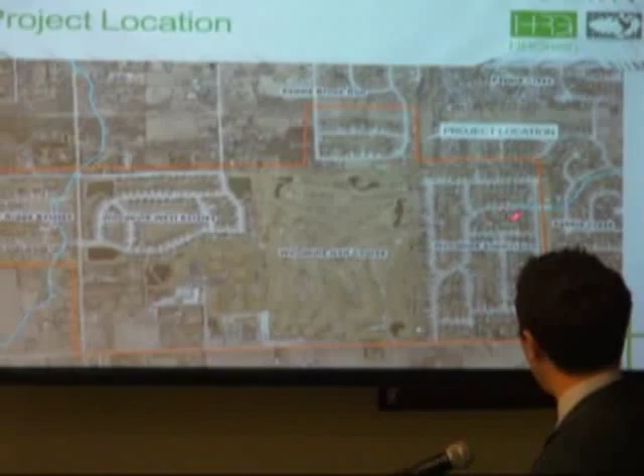So within the entire village, this is where we were studying, and more focused in, we're studying these subdivisions. It's important to note that these two streams here are part of the Long Run Creek watershed. So part of our project, we did a lot of background research to determine the extent of flooding, and just how frequently it was happening, how bad it was. We did this by meeting with village staff and the road district. We also looked at photos that were supplied by the village and road district as well as residents. We reviewed available topographic data to determine the areas draining into the study area.

And then we also sent out a resident questionnaire. I believe we sent out approximately over 450 questionnaires, and we received about 33% back. And for studies of this nature, that is basically unheard of. 10% is a good percent. We got a lot of return on this, so it's definitely worth doing the resident survey. And then we also held a public meeting where residents were able to come in and ask questions about their specific properties or bring up ideas of how we could solve some of these drainage issues.

All this information was used to generate a hydrologic and hydraulic model, which we used a computer program called XP-SWMM to model the watersheds and determine how flooding was actually occurring. So this is just a photo of a past event. This is an intersection in the Woodbine subdivision. It actually looks like a lake. So this is, to me, very serious flooding for a neighborhood to have.

And when we started doing some of the topographic research, we did notice that this type of flooding made perfect sense. We have a lot of off-site areas that are actually outside of the study area, but they drain into these neighborhoods, so they need to be accounted for.

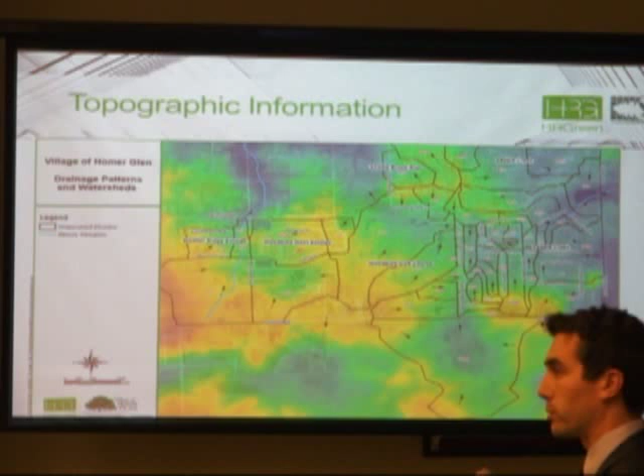We've presented this image before, but this is just showing the study area with elevation depicted as color. The orange and yellow are the high areas, and then as you go down, you get the green and blue areas, and that just shows you the relief throughout the study area.

So our resident survey came back, and we went through and mapped who responded to the survey, and then depicted what type of flooding they reported based on color. We surprisingly actually had a lot of people who reported that there was no flooding. The people with this black hatch over them, they reported that they did not have any drainage issues on their property. And then as far as people who did report issues, we kind of did what we thought was an intuitive way of depicting their problem.

Red was the worst type of flooding to be reported. This was structural flooding of a basement or a home. Yard and street is everything being inundated. And then all the way to yard flooding, which was depicted in green, which it's a problem, but a home wasn't flooded in these instances.

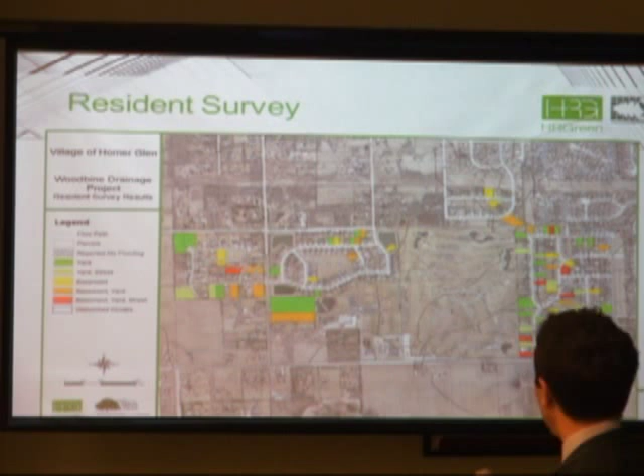So, as a reminder, we've presented this before, but there are really three ways to manage stormwater. The first is to convey it. This is to put larger pipes in the ground, to open up ditches and swales. You can also detain it. This is where you store water in a detention pond and release it slowly so that your conveyance system can manage the flow that you're releasing.

And lastly, you can infiltrate it. Now this is the use of rain gardens or naturalized detention basins in which you actually will soak water into the ground rather than conveying it directly to a stream. This can be useful for smaller events where rain isn't that intense. You can actually hold the water and rely on it to infiltrate into the ground.

However, we did a soil study for the area, and there's a lot of clay in the ground, and clay does not readily infiltrate water. So for large events, infiltration will not be the solution to any of the issues out here.

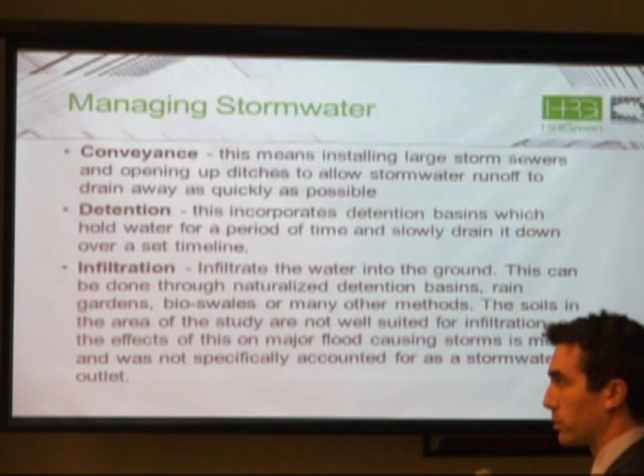So now we're going to go through subdivision by subdivision and discuss some of the improvements that we've been proposing. We're going to start out with Stadtler Ridge Estates. As I had mentioned before, from the southwest, we have a fairly large drainage area of agricultural land. It's draining basically through the subdivision to the northeast. It's, I believe, 58 acres draining through a subdivision that most likely was not designed to have that flow go directly through it.

The primary source of conveying stormwater through here is a 12-inch field tile. And that's depicted, this red line here. It zigzags through the subdivision and outlets into a detention pond on the northeast corner.

Now, field tiles are pipes that were most likely installed before any of these subdivisions were here. They're put in the ground and they're meant to drain groundwater. Over time, people will tie inlets into them and use them as a storm sewer, but in reality, these were most likely installed to drain agricultural land. Now, agricultural land, if it rains and there's water stored on the surface for a day or two, it's not really bothering anybody.

But when you build homes there and rely on that to drain everything out, if you have water standing in people's yards for a few days, or potentially flooding a structure, that's not the best way to drain your areas. It's not very reliable. So something that we've been proposing is to take that drainage area from the southwest and actually bypass it around the subdivision.

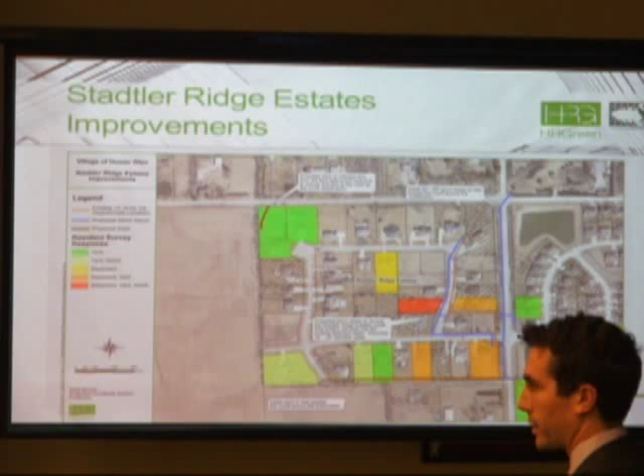Now, you may be thinking, why can't we just increase the size of that drain tile? We are able to actually improve the drain tile within the village's right of way. However, if it's on private property, it is up to the private property owner to maintain that pipe. So to really make this something that the village can rely on to drain the subdivision, we're proposing installing something entirely within the right of way so that we have rights to it, to maintain it, and just to make sure it's functioning properly. We believe that this will address most of the drainage complaints that we received throughout the Stadtler Ridge Estates subdivision. Next, we're going to move on to the Woodbine West subdivision.

Through the topographic survey, this area is actually fairly well drained. It has some good relief to it, and it's higher up relative to the surrounding areas. I did mention, though, that the southern portion of it down here has 45 acres draining into this detention basin here, which then flows through private property. We spoke to this property owner here, and they were mentioning that they do have yard flooding frequently. Something that could be done is an open channel could be graded on their property. However, this is on private land.

And additionally, downstream of there, we have a section of drain tile that is within the village's right of way, the road district's right of way, that can be improved upon, but everything on their property would be their responsibility to improve. So we are able to actually make modifications to this basin or modify the drain tile downstream. And this should improve things for that property owner.

Now, you might notice a lot of other people up here who've filed basement flooding complaints or yard complaints. This area is actually one of the highest areas throughout the entire study boundary. And it doesn't really make sense looking at the topography that they would have drainage complaints there. The plats for this subdivision have a swale running through the rear yards with the high point being right about here. But if you look at the aerial photography right now, homes just downstream of where we were receiving complaints, it appears that they've actually built fences across their swales that were meant to drain out the rear yards and potentially installed landscaping that would block flow paths. And we end up getting drainage complaints directly upstream of them.

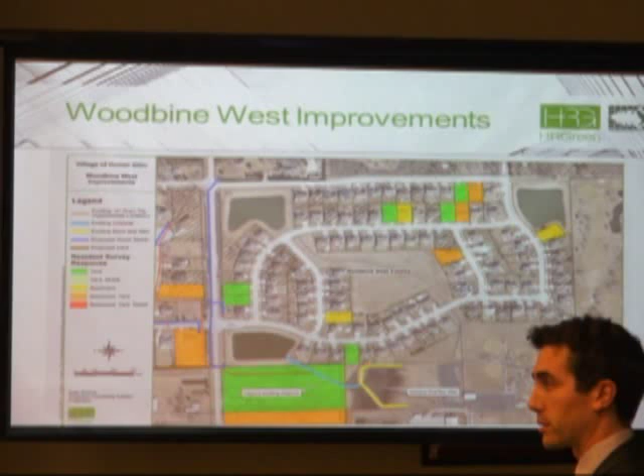The next subdivision was the Saddlebrook. This is another very high area, and all the reported flooding through here had to do with sump pump failures. So again, we do not propose any improvements here. Through studying the drainage system here, it appears to be functioning fairly well.

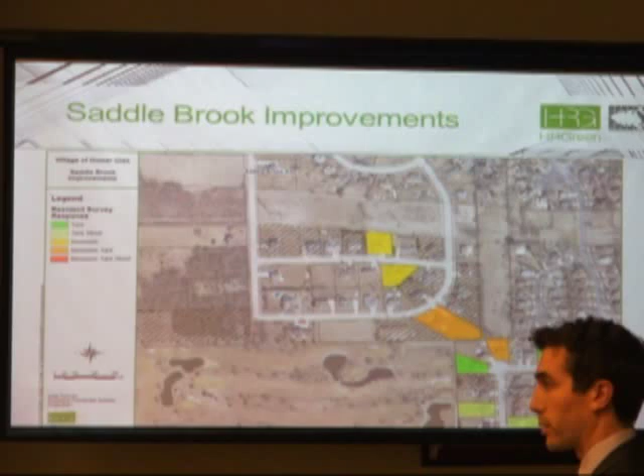And this leaves the Woodbine subdivision. This has the largest area draining into it and did have a very high rate of response from the residents during their survey. So because this was such a complex drainage area with large watersheds draining into it, we used a two-dimensional XP SWMM model here.

Now this is a computer program that takes all of the storm sewer system and links it to a 3D surface in the computer. So anytime the storm sewer or ditches become overwhelmed, it'll actually let the water overflow onto a 3D surface so that we can map how far flooding actually occurs, how deep it gets, and how long it stays on the surface.

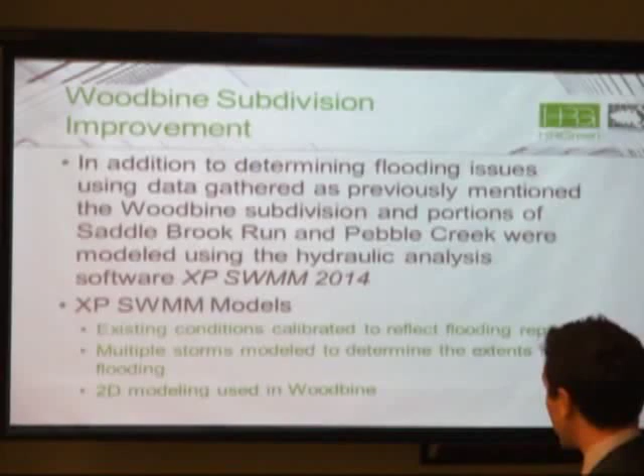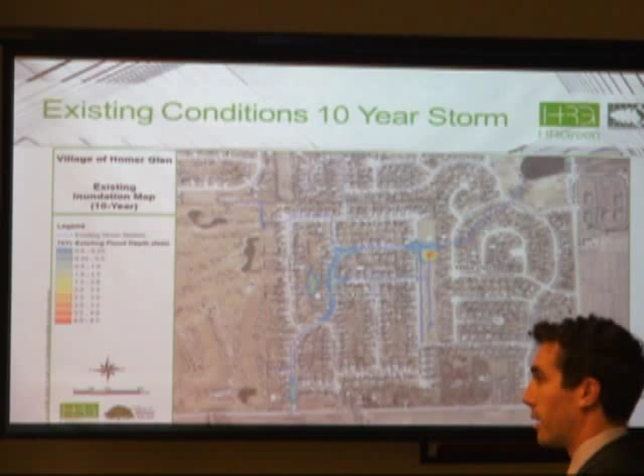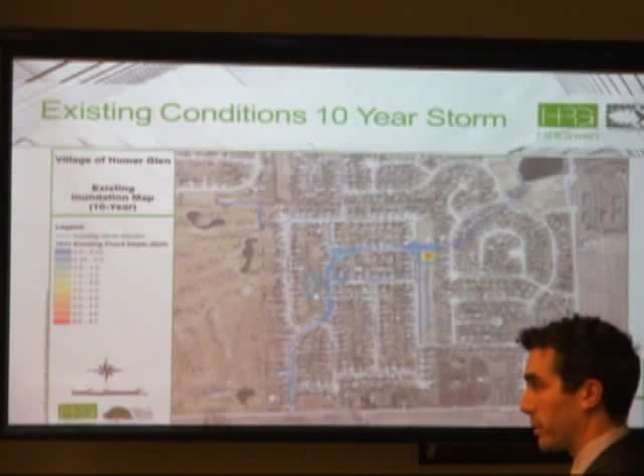So, our solutions, as I mentioned, infiltration with heavy storms in the soils that we have is not really viable. So we looked at conveyance and detention. Through a survey of the storm sewer system, we did determine there are a few locations where the storm sewer was actually constructed so that it's back-pitched, meaning it does not slope downhill. Water will actually have to build up in the pipe before it can drain down. So we noticed that in one location that is actually a pretty big issue.

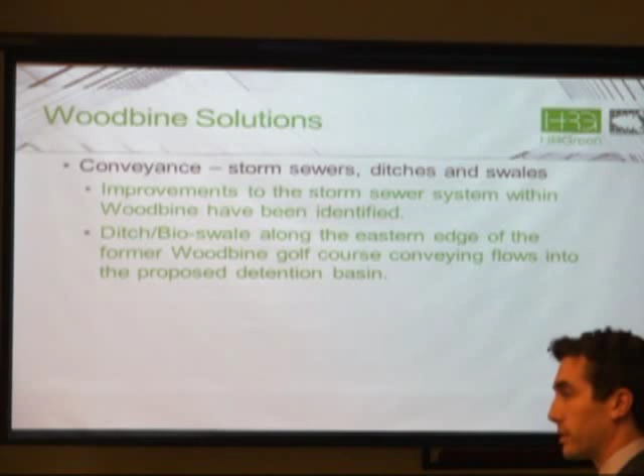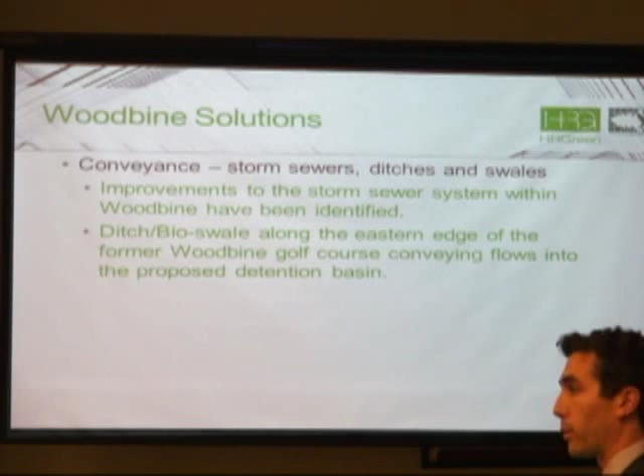We did notice that some of the sewers appear to be undersized, and that we did also get a lot of complaints from residents who lived immediately along the former golf course, saying that the golf course just sheets into their backyard. They have kind of undefined flow entering their backyards. So something that we're proposing there is potentially a bioswale to direct flow out of their yards. A bioswale is just a ditch that's planted with native plants. They're actually very visually appealing, and they help a lot with water quality. I'll talk about that a little bit more in a moment.

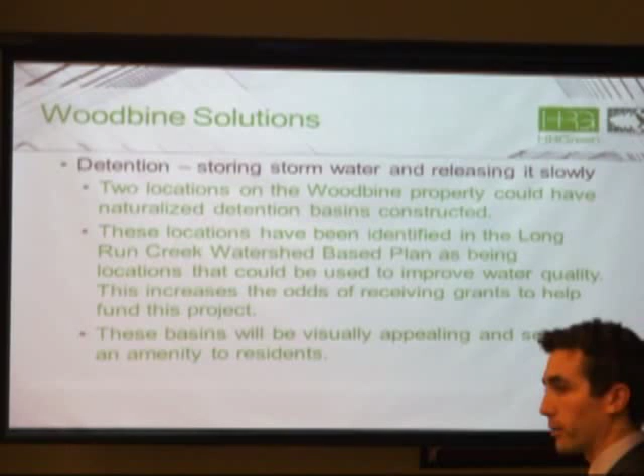The second thing is detention. There's a lot of open space on the former golf course. So we're proposing installing 2 detention basins, and these would be a naturalized detention pond. And that's planted with plants that are native to the state of Illinois, and they have a very deep root system. Now, this is beneficial because those roots go down into the clay soils, which don't readily infiltrate water, and they can actually break it up and make it so that more water will infiltrate into the ground than it currently does.

Now, I'm going to go through just really quick how our solution will look in the Woodbine area. We're proposing a phased approach. The first phase will be to fix the undersized storm sewer and some of the back-pitched pipes. Now, those are the pipes in orange here, right through Center Park, connecting into Pebble Creek. And along Kentucky Lane here, there are some sewers that were actually installed undersized, it appears. So doing that is a smaller project that can be done rather quickly, and that will drastically bring down the amount of flooding that we're seeing.

Phase 2 is that we're proposing installing the naturalized detention basins in the former Woodbine Golf Course. That would be approximately this footprint and this footprint down here, and we have better images of these later on. And then the third phase is essentially an overhaul of the main trunk sewer through Eagle Ridge Drive here, and that's the green dashed line. That would be removing the existing storm sewer and replacing it with larger pipes to fully convey the 10-year storm. Those pipe sizes vary from 18-inch up to 48-inch in diameter.

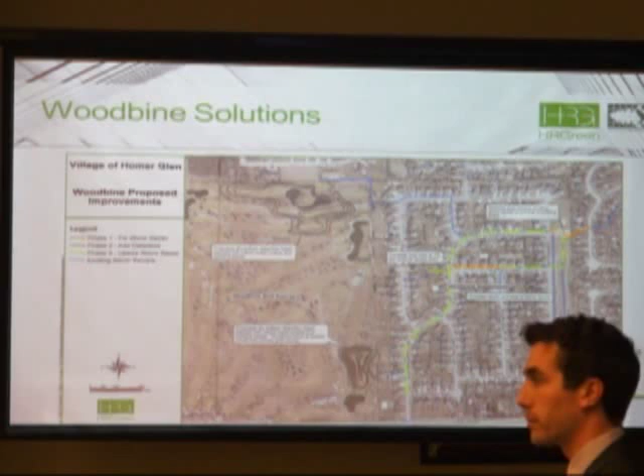So on the golf course property, these were the footprints of the naturalized basins that we were proposing. This is what we worked with Applied Ecological Services to develop. And these areas were noted in the Long Run Creek Watershed-Based Plan as locations that can be improved upon to improve water quality in the watershed as a whole. Now this is very important because that allows us to apply for funding to actually have these basins constructed.

Now, the fact that the Long Run Creek watershed-based plan has been approved by the IEPA means that we're eligible for a type of funding called the 319 grant, which can help quite a bit with funding projects like this. We've, in the past, received about 80% of a project paid for by the Illinois EPA.

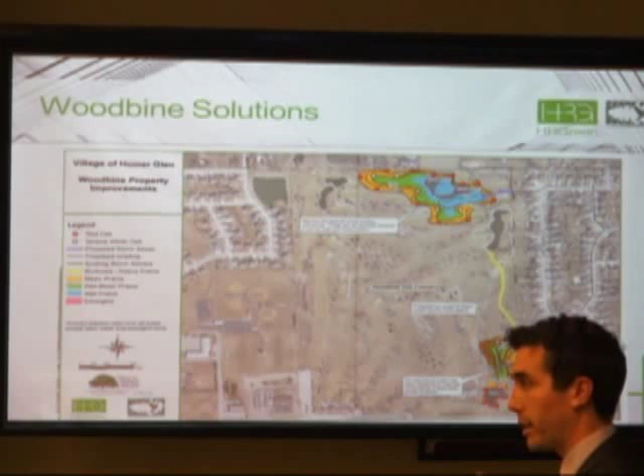It's also important to note that the existing open water that is out there, with their golf course hazards right now, they will be maintained. They can remain there. It's not like we're going to be digging them up and draining them out or anything. So we'll still have open water out there, and those ponds can actually be expanded upon as part of the park improvement. These basins can actually be used as an amenity in the park.

We've got a few photos here of a naturalized detention basin and then a wetland. But this is somewhat what these basins would look like. We have the existing open water, and then around it, native wetland plants. A lot of these are flowering, and they are actually designed to out-compete cattails so that they'll be low-profile plants, and we can install, as part of your park improvements, trails around here or boardwalks and things like that so that residents can enjoy these basins.

This is an example of a naturalized wetland, and got some oak trees in the background. We're actually proposing installing some oak trees to replace a lot of the ash trees that have died due to ash borer recently. But this is what we would expect to see out there. These are actually projects that have been constructed by Applied Ecological Services, our partner on this project, and they actually build these. They're a contractor who can go out, and this is the type of work that they do.

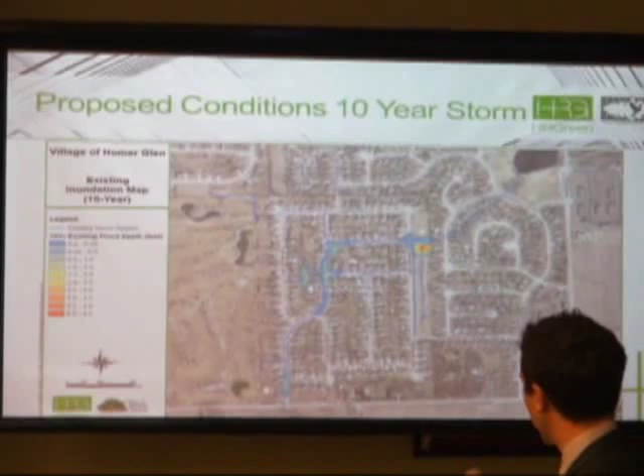So the big question is, what is this going to do for the flooding in the subdivision? Now, just as a reminder, this is what the existing 10-year storm is doing, and this is what a storm sewer should be designed to handle. We've got all the flooding through the intersection of Kentucky and Eagle Ridge, and at the intersection down here. We're doing a phase 1 improvement. We're able to bring down flooding pretty dramatically through this intersection and reduce the footprint of flooding here. This actually brings it down so it's primarily within the roadway, but we still have a little bit of backyard flooding here.

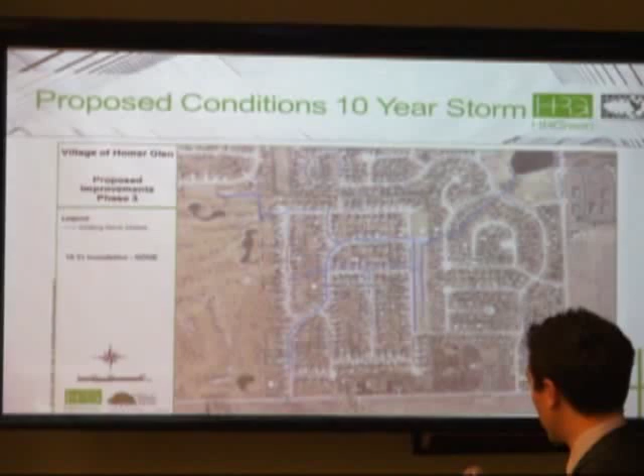Now, again, phase 1 improvement was just replacing the pipe right through Senator Park here and a small portion through Kentucky Lane. Phase 2, adding the detention basins out in the golf course, we further reduce the footprint of flooding during a 10-year storm. And then by doing the phase 3 improvements of replacing the storm sewer, we can have no street flooding at all.

So the next steps are for the village to review the report. We've completed it and supplied copies of the report. You can review the recommendations and determine which projects you would like to move forward with. From that point, final design and construction documents will need to be prepared prior to anything actually going into the ground. But we would expect construction to begin as soon as funds are available, because these projects will definitely improve the drainage conditions out there. So with that, are there any questions?

Yeah, that's a great report. Thank you. Very thorough. The presentation you had for the hearing, a lot of this information was there, and I did pick your brain a little bit, answer questions. To this point, you haven't done any soil sampling at all yet, right? No, we use something from the NRCS. It's a web soil survey, and you can go in and look at an area of interest, and it will give you all the hydrologic soil classifications.

Through this area, they're considered type D soils, and that's actually the worst for infiltrating water. That means that a lot of the rain that falls on it will actually run off, similar to a parking lot. Okay, I know on the phase when we put the detention area in the northeast corner and along the eastern border there, there's going to be a considerable amount of dirt to move.

So we're discussing this basin down here. What happens right now is that when it rains, this portion of the golf course drains into this retention pond, and then when this overtops, it flows directly at the homes right here. Now, what we'd be doing is modifying the overflow point for this retention pond, the open water, so that it would overflow into this detention basin. This would eventually be a dry bottom basin, but for approximately 48 hours after a storm, it would hold water in the bottom of it and slowly drain it into the storm sewer system, and then eventually along Eagle Ridge Drive through the subdivision. Both of these were designed to maintain the existing footprint of the wet ponds, and then to eventually become a dry bottom pond again.

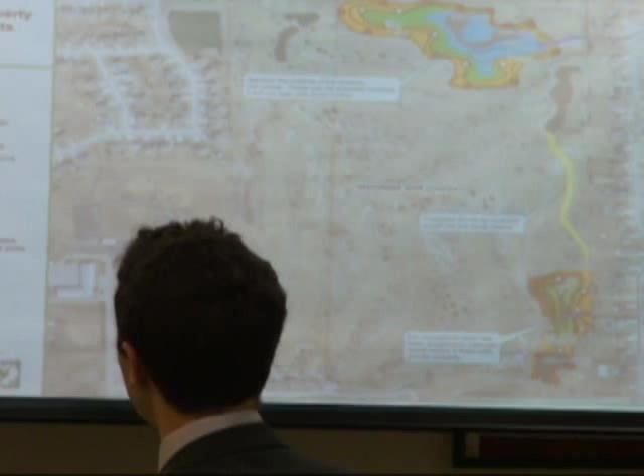As we had discussed a little bit on the side, these ponds can be expanded as part of the park, and they won't harm the performance of these basins. If the village would like to excavate more to make these larger ponds, that can be done, and it won't affect the performance of the basin at all. Okay, that was going to be my next question. So one of the potential amenities we've discussed is a fishing pond or something of that nature, and that can be expanded upon if that was decided. Yes, it's discussed in detail in the report, along with some recommendations as to how to maintain water quality if these ponds are expanded.

And the bioswale that we're talking about, that's all on park property, right? Yes. That's not an easement, that would all be park property? Yes, it's this yellow strip right here. What's happening is this portion of the golf course is actually draining right along the property line and getting into these backyards here.

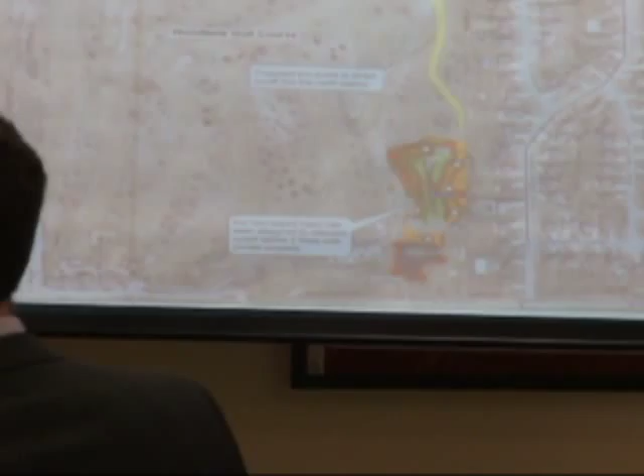By putting this here and directing it into one of the existing open ponds there, we'll stop that flow from entering all the private property and keep it on the golf course, and then actually force it into the detention basins, so they can be stored and released slowly.

Hey, what's the approximate width of something like that, of a bioswale like that? The top width is normally about 20 feet. They can be made narrower, but we would like to keep them a little bit deeper, probably 2 feet deep from the top where it ties into the existing slope to the very bottom.

And they can be planted with flowering plants, native grasses, and not all these plants need to be 5 feet tall. A lot of them, we can pick a plant palette that's below waist height or even knee height. So you still get all the flowers, but it's not going to obstruct your view. And a lot of these plants, we work with Applied Ecological to actually pick them. They specifically choose plants that do not look like weeds.

And then I think maybe my final question, in the Woodbine subdivision, most of the work that we're talking about, and I think maybe this was touched on at the public meeting, but most of that work, when we talk about running these sewers through, most of that can be done on public easement, not tearing up pavement, that sort of thing, but between sidewalks and street.

In the locations where the existing storm sewer is underneath the street, we would just be using the same trench to dig up the old one and install a new pipe in the same trench. So we would not be having to tear up the entire street, but in locations that it currently is underneath pavement, it would make sense to install in the same location. Generally, the main pipe that carries the majority of the flow is located between the back of the curb and the sidewalk. However, with the winding streets, it does make it so we can meet the pavement in a lot of locations.